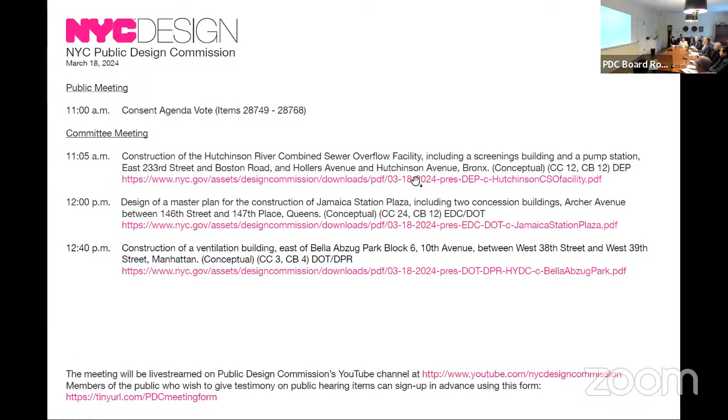And we'll now begin the committee meeting. We'll start with the conceptual review of the construction of the Hutchinson River Combined Sewer Overflow Facility at East 233rd Street and Boston Road and Hollers Avenue and Hutchinson Avenue in the Bronx. Again, we'll not hear public testimony or vote on this project today. Presenters, you can begin when ready.

Good morning, commissioners, it's nice to see you today. My name is Alicia West, and I'm from the Department of Environmental Protection. I'm the Director of Public Design Outreach. So we're really excited to be here today to present our designs for our Hutchinson River Combined Sewer Overflow Facility. I'm joined today by Austin Seid from HDR, who will be doing the rest of the presentation. Kevin Lloyd is also from our consulting firm, and my colleague from DEP, Wing Zito.

Okay, so our project is located in the northeastern section of the Bronx in Eastchester, on the western side of the Hutchinson River. The area is zoned manufacturing, and we're actually inside the industrial business zone, or IBZ, which was created to foster and grow industrial businesses in the area. We're going to be presenting today designs for two buildings, a screenings building and a drainage pumping station. Both will work together to reduce the effects of combined sewer overflow into the Hutchinson River.

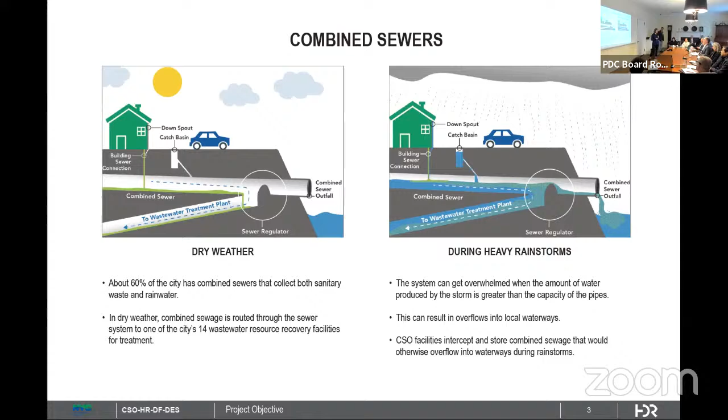And the reason it's like this is actually because it was designed to behave in this way—it was designed as a fail-safe. So rather than having combined sewage come up into people's homes or into the streets, it was designed to overflow into a local waterway, in this case, the Hutchinson River. And we've been working with our state and federal government partners to reduce the amount of combined sewer overflow citywide. Combined sewer overflow facilities are one such solution we've been working on, and the way these work is they basically intercept and store that combined sewage that would otherwise overflow into the waterway during a rainstorm.

And so what those are doing is they're pulling out any debris that's found its way into the sewer, whether that's litter from the street that swept down a catch basin or what have you.

Then the water is routed into this very large underground conduit or tunnel. This is a storage tunnel. It can hold 2.8 million gallons of combined sewage.

Should we ever have a storm that exceeds that volume, we do have the ability to outfall into the river. However, that sewage will have the benefit of already going through the screenings building, so it will be a

much cleaner overflow than it would if it was just a direct outfall. Okay, so our water is impounded in our storage conduit, and when the storm passes, we have our drainage pump station, which pumps the combined sewage out of the tunnel and back into the sewer system here on Pinckney Avenue. And then that is conveyed to our wastewater treatment plant in Hunts Point.

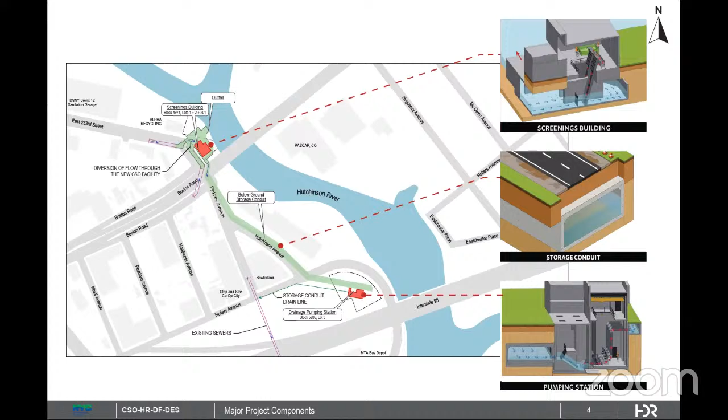Thank you, Alicia. Just make sure this is working. Hello? Is mic working? Yes, we hear you. Thank you. You can hear me okay? Oh, great. Thank you for having me.

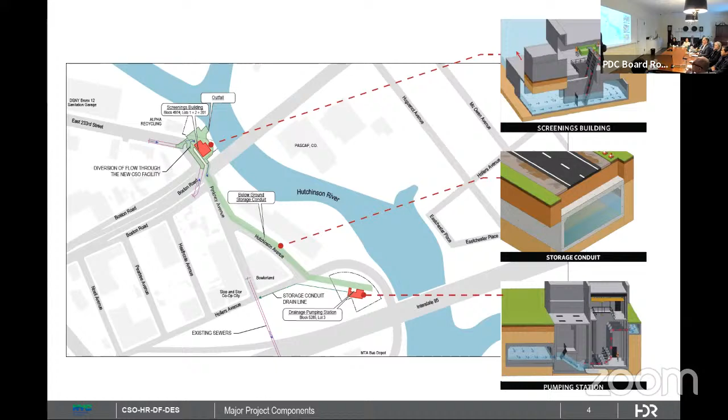So here's more of a contextual view. What do they glimpse at now? Right now, they're looking at recycling, industrial type facilities that move scrap material.

So as I move on, you'll see some of these other facilities. But again, you have industrial on this side and residential over here.

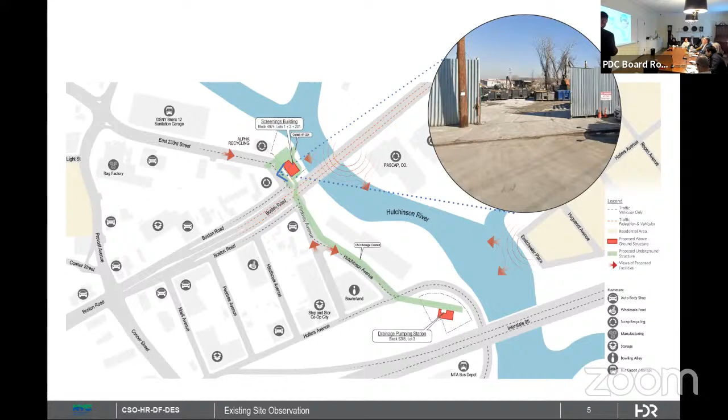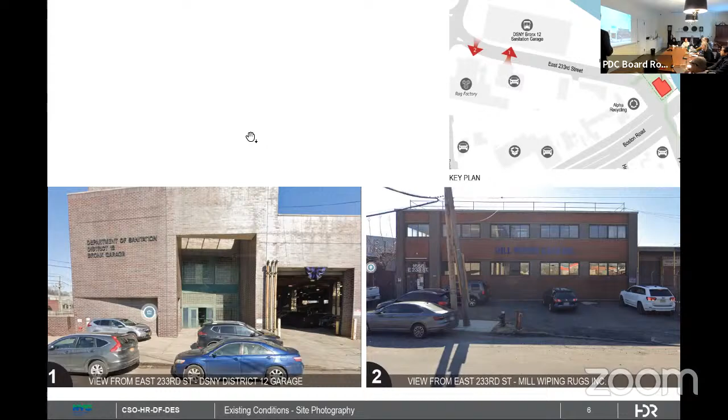And then here on the right, you have the Mill Wiping Rugs building, mostly masonry, has some ribbon windows. It lets in natural daylight. It's probably very interesting to work in that building.

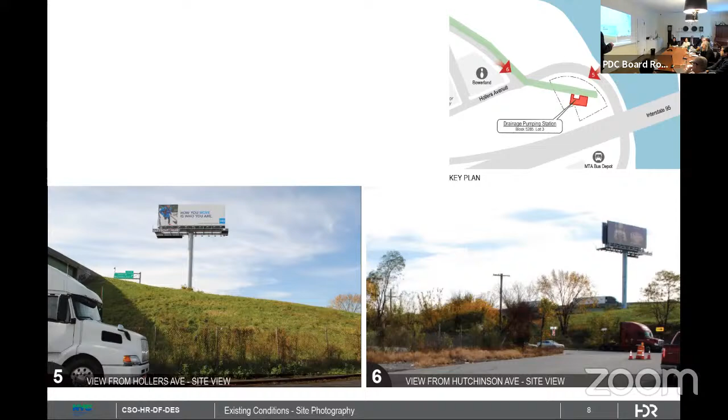And then, of course, we have our billboard, right? We have our beautiful billboard here. And then we have other types of businesses, scrap metal, junk, storage facilities, and they all have this industrial language of corrugated metal, exposed steel, access gates, signage just kind of popped on the face of the building.

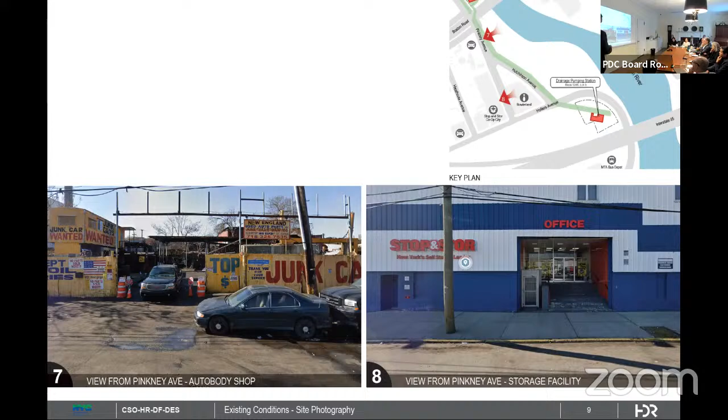So we have a kind of wide vocabulary of various industrial type buildings that we were looking at in the early stages of design. We thought, this is a project about moving water, we're on the water, can we extract some of the interesting qualities of water, the rippling texture, the specularity of the surface. We thought maybe we start with the vernacular industrial language that we're surrounded by, and then amplify that a bit.

So we started with the rippling of the water. Let's come up with a couple of module types that we could use to drive the envelope of the building. Now we know that this is an industrial type building.

It's for the Department of Environmental Protection. These buildings are very functional, driven by equipment and by the conduit that runs underneath the ground. So in terms of site orientation, it's really important that the buildings are configured and oriented with respect to the conduit - where's the water, and how do the buildings interface with what's going on below the ground.

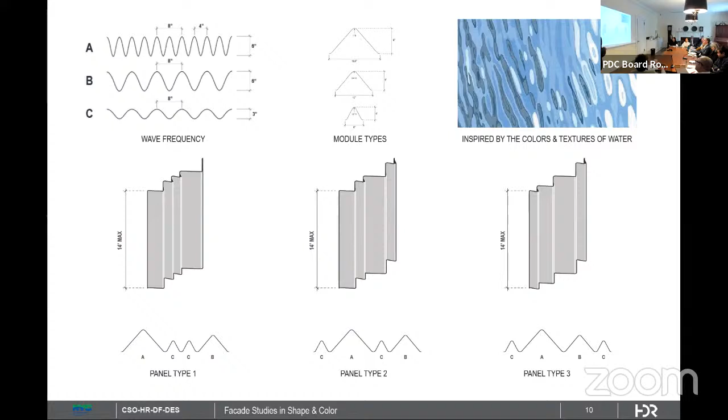With all of that said, we wanted to focus our effort on trying to develop an interesting looking building, because there's a lot of building underneath the ground that people are not going to see. So we're trying to accentuate what people do see. We developed this panel language of potentially different panel profiles.

And then we thought about color. Maybe we could look at parts of the facade that could have a gradient, with kind of the playfulness that the surface of the water has. And we thought it might be interesting to start with the colors of the DEP logo.

So people would experience the building and immediately understand - if they're familiar with the colors of the DEP, they would kind of get it, it would make sense. This is a DEP building.

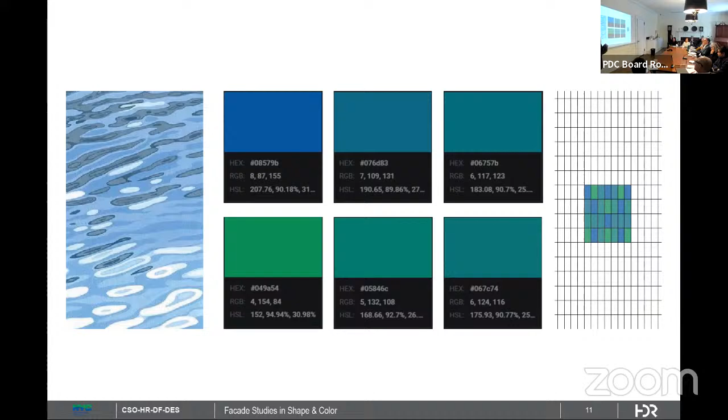And then we were thinking, okay, are there any other buildings that do this? So we did search around a bit, and we landed on a couple of buildings. One is this building by Damien Hirst Studio.

It has a beautiful brick facade, a glazed surface. It's very organic, it undulates. The bricks are custom, but it's gorgeous.

And then we have these other buildings here, Heytown Art Center, fantastic perforated metal facade, very durable brick base. It's almost like it's beautiful because it's so simple.

And then we have this building, the School of Film and Television at Loyola University by SOM, which has this interesting facade consisting of a perforated screen cladding. It has these undulations that really lend themselves to the kind of study we were working on at the time. So these were our precedents, and this is where we started.

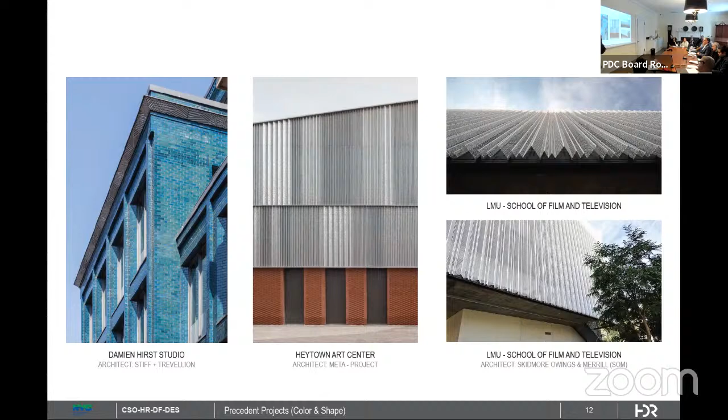And where we graduated to was, what if we have a building that has this really organic, undulating brick veneer? We know these buildings are very horizontal, so we want to also accentuate the verticality of the building. So we orient the brick in a stack bond vertically.

We create a transition strip out of a ribbon window, similar to some of the buildings we're seeing out on the strip there on East 233rd Street. It reflects the sky, it lets in daylight. This is not a normally occupied facility, but we still want to make sure we're providing daylight to the people that are going to actually be entering into the rooms.

And then we have this fantastic opportunity to create this rippling metal facade. So you have all of this precedent for corrugated metal, but we're drawing our cues from the water. So there's this fantastic opportunity to create an undulating, ever so changing facade as you move around the building.

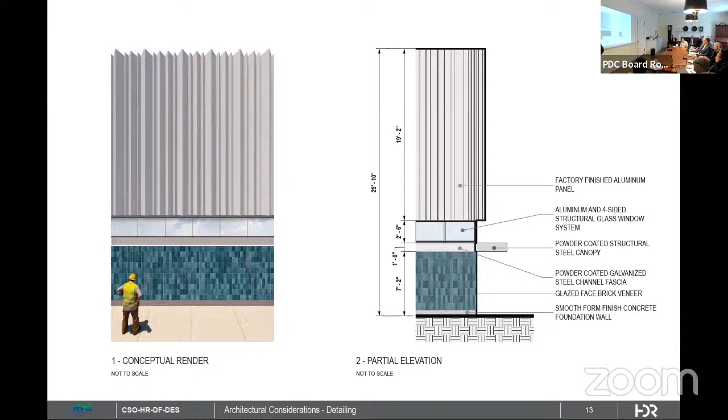So we tested it, and this is what we came up with in the initial phase without deploying it on either of the sites. To take it a step further, we thought about the cladding system - not only are we drawing our cues from the water, not only do we have water in the conduit, but let's create a rain screen system so that we're actually bringing water into the building. Let's let the water into the facade so it enters into the skin of the building, and then we release it out through the sill when it weeps.

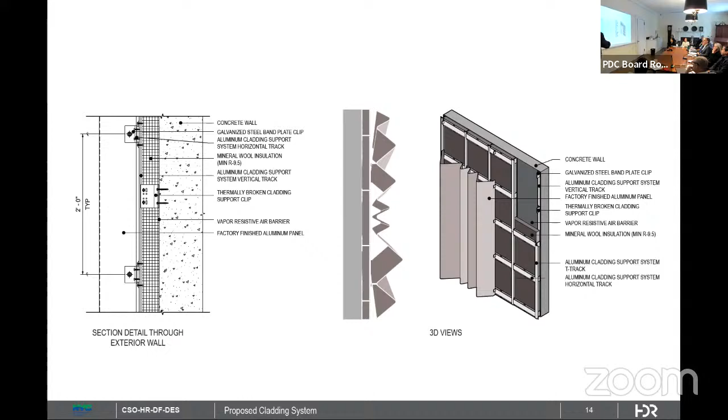So this is just an example of the rain screen cladding system. Insulated facade - you can see the mineral wool insulation back here, and an aluminum support system.

But the interesting thing about this site is that it's right on the Hutch. So once you get to the back of the site, there's a very sharp embankment that goes down into the river. So what we did was we thought, okay, we have to consider where's the conduit in relation to the site, and how does the building get organized on the site.

And then once the building was locked in place, we started to bring truck movements in and think about how we're going to bring debris, because as Alicia mentioned, the screenings building functions by taking floatable waste out of the water stream. And to do that, there's actually equipment in the building that rakes debris out of the water that's in the conduit below the building.

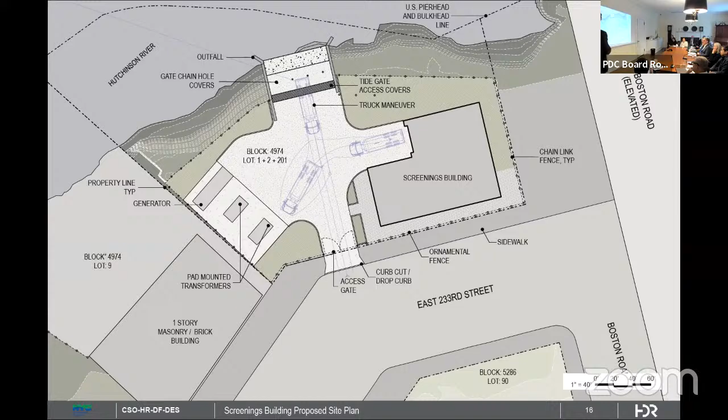So this is the building here. The first floor of the building, as I mentioned, has the conveying system and the bar racks. The building's about 55 feet wide by about 71 feet long. The two major spaces in the building are the electrical room, which is kind of the service side of the building. There's also a room here for the backflow prevention system and a toilet for the employees when they do show up on the site.

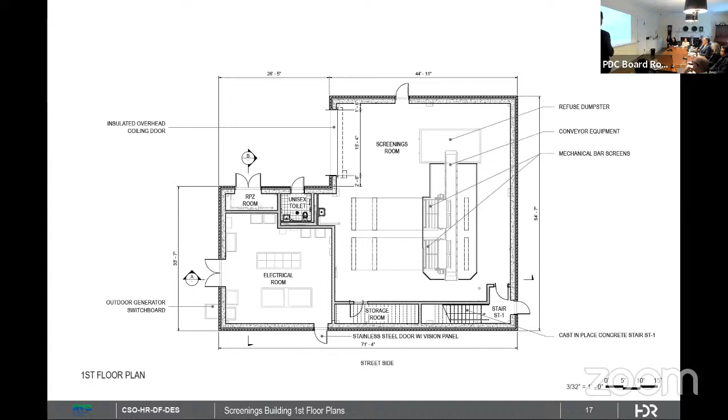Most of the rooms open outwards. They don't generally communicate with each other. That has to do with the classification of the spaces with respect to hazards. So everything really exits out. The only stair in this building is in this location here, and this goes up to the roof. This is the low roof, and this is the high roof.

And currently we are taking time to plan out where the heating and ventilation equipment goes, the various drainage systems for the roof. And in particular, on the high roof, we have this element here. This is a hatch, so that at some point in the future, if they ever have to take the equipment out of the building, they can take the hatch off the building and crane the equipment right out off the roof.

And if I'm not mistaken, there is an intention to put solar panels on the building to generate electricity, and that's currently being worked out as well. But before we put the cart before the horse, we have to work out the systems design first, and then we see what's left and available for solar panels, and then we'll start studying that a bit.

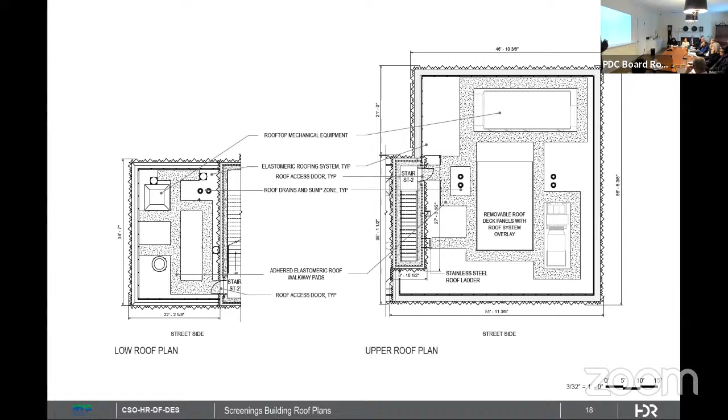The bulkhead stair is the highest element in the building. Overall, the screening building is about 40 foot 6 inches. But that's for the bulkhead stair, about 30.5 for the high roof, and about 20 feet for the low roof. So at its highest point, it's about 40'6".

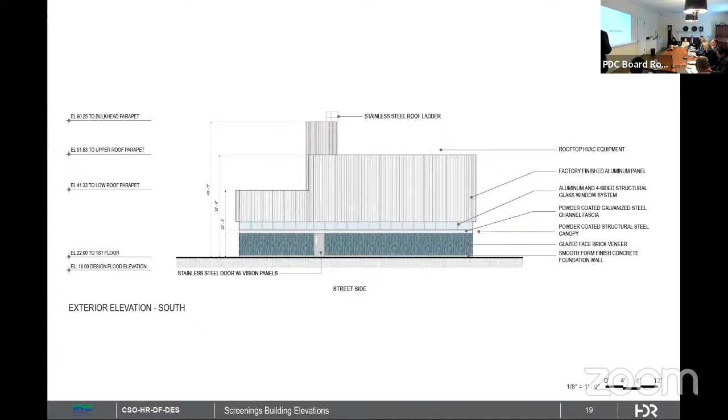On this side, you're seeing the overhead coiling door. Again, this is tucked behind the building, so it's really not expressed towards the street. The business end of the building is tucked away. While people are pulling trucks in and out, it's really not happening out front. Even though it's an industrial character neighborhood, it's kind of tucked behind, which I think should be more peaceful.

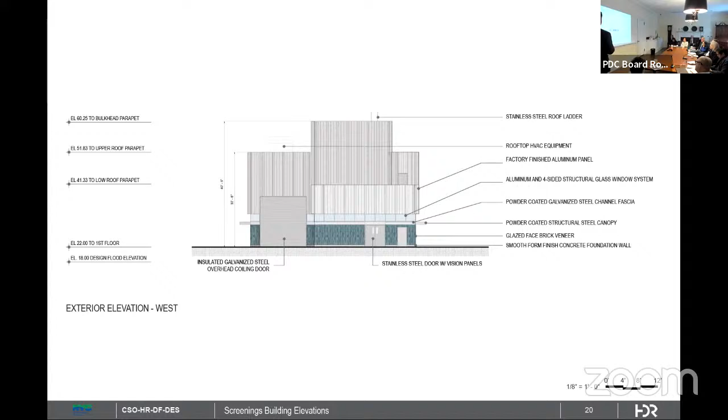Another side of the building, very similar. All four sides have a very similar aesthetic.

Right here, you have these rakes that go down into the conduit and pull material out. It actually dumps it onto a conveyor and then dumps it into a container here, and that's what the trucks are accessing. They're coming through the overhead door, grabbing the container, and pulling it out. So the building is very much driven functionally in terms of the equipment.

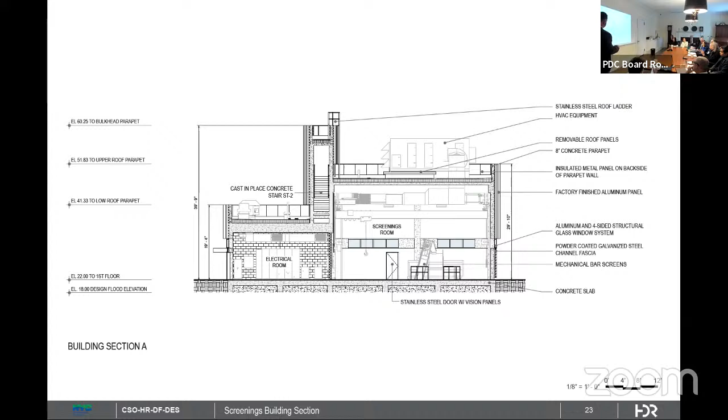You have a bridge crane in here that moves back and forth to grab different pieces of equipment. Then you have another layer for HVAC equipment, and then the roof. And then you have the hatch and the HVAC equipment on the roof. Another section through the service space showing the overhead door.

I'll move on to the next slide. Any questions about the screenings building?

This will only be occupied for security and maintenance, at certain times when there's like a huge storm, basically. We send crews out. It is an unmanned facility, so it operates remote. If it's necessary, it turns on. We have operators who visit it to make sure it's in good shape. They come by usually once a week or daily, or just depending on what's needed, but there's not anyone working in here.

On the design, I was just looking at the section because you're near the river, and I was thinking of your electrical equipment on the first floor and all that. Both of the buildings are designed above the base flood elevation, plus freeboard, plus all of that. Everything is protected.

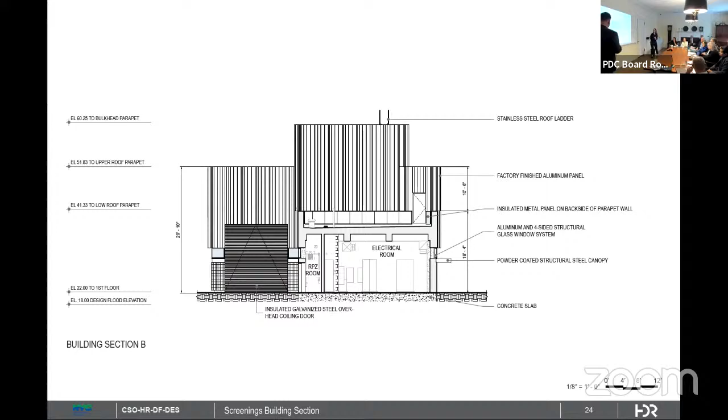So let's talk about the drainage pumping station a bit. As I showed you before, this is a pretty severe embankment next to the New England Thruway. There is a truck repair facility on the north side of Hollers. Hutchinson transitions into Hollers. Hollers goes underneath the Thruway and comes out on the other side. If you know anything about this area, you might know that on this side of the highway is the MTA bus depot.

So this is the street I was telling you about, that's mostly trucks and trailers and folks just kind of camping out. There is no sidewalk on this side of the street, and there is this large embankment, and we have this billboard structure here that I was showing you in the photos. We are on lot 3.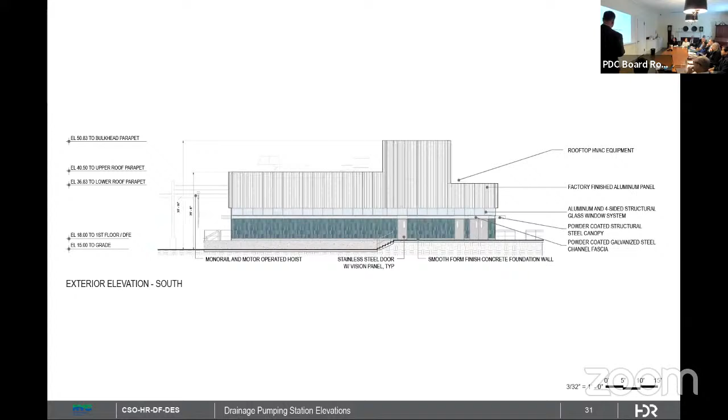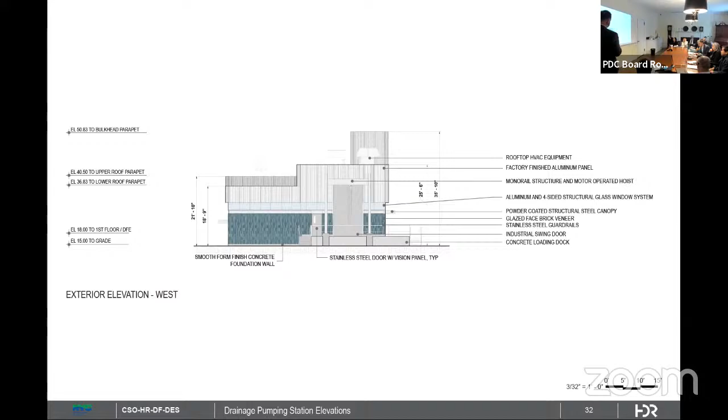We have a large industrial swing door that's used to bring the equipment in and out, and this is the structure here that will support the monorail for bringing pumps in and out of the building through the industrial door. Here's a section through the building showing the service.

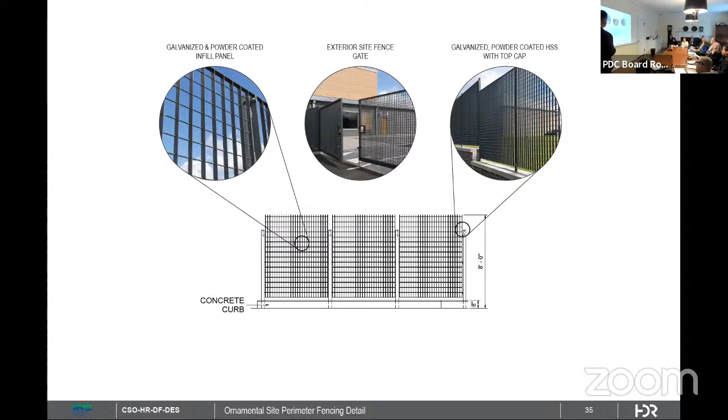As I mentioned before, both sites are going to require secure environments. We're planning for a perimeter fence consisting of a short 8-inch concrete curb, a durable base with an anti-climb type fence with very narrow gaps so you cannot get a foothold on the fence. The tips of the fence would also have pointed edges to prevent people from scaling it. All galvanized steel and powder coated.

We're currently planning for premises identification totems on both sites. We're experimenting with whether they're located in the perimeter fence or set back. The important thing is that the fence is porous enough to be able to see the building, so we're not basically blockading these fantastic looking buildings that we're designing. You want to be able to see them, experience them, and enjoy them.

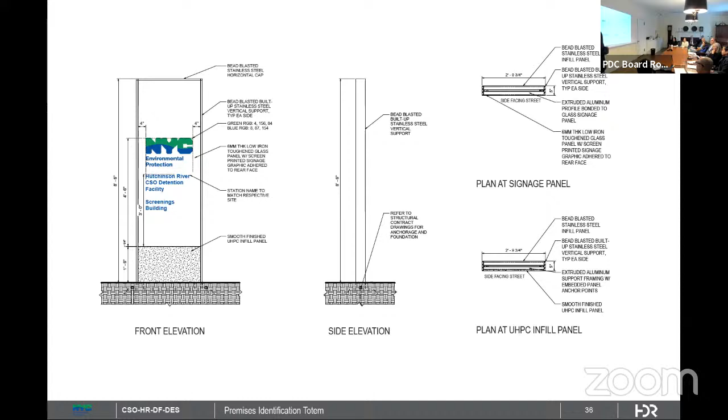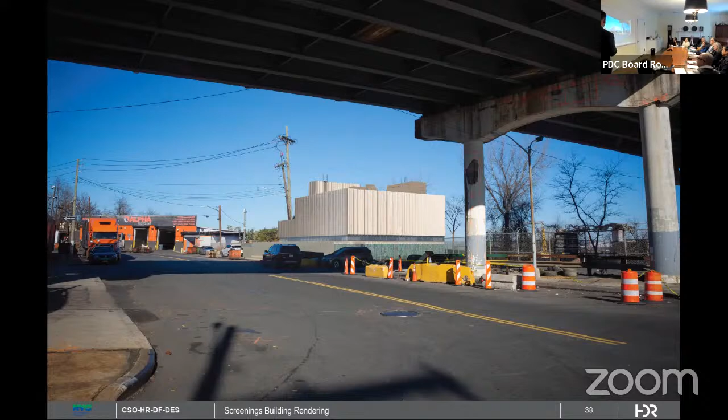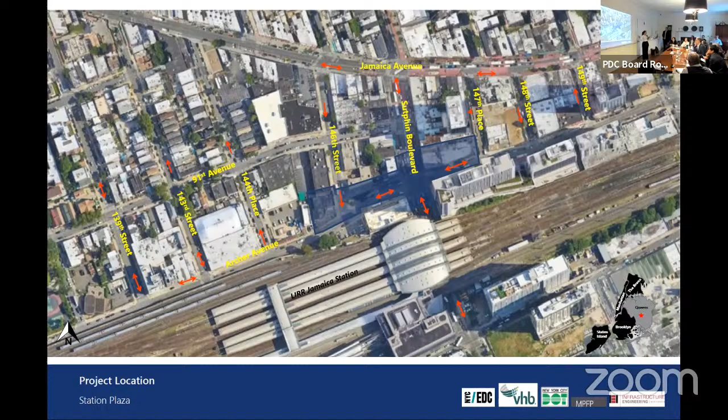Okay, so I'll just talk at a high level through some of the existing conditions and neighborhood context. We are in downtown Jamaica. In blue here we have the approximate project outline. In addition to the public space, we are also modifying a portion of Archer Avenue — so it's public plazas in conjunction with the streetscape.

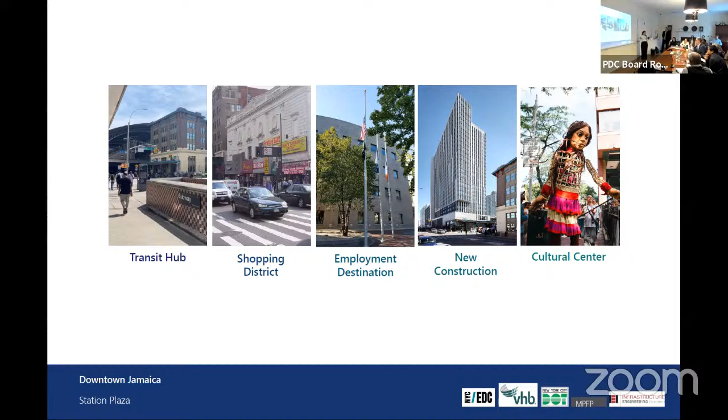Most people are pretty familiar with downtown Jamaica. It's a major transit hub, shopping district, employment destination, with a lot of new construction and new high rises going up, but also a major cultural center. So this project, we're aiming really to provide additional value within the context of the neighborhood.

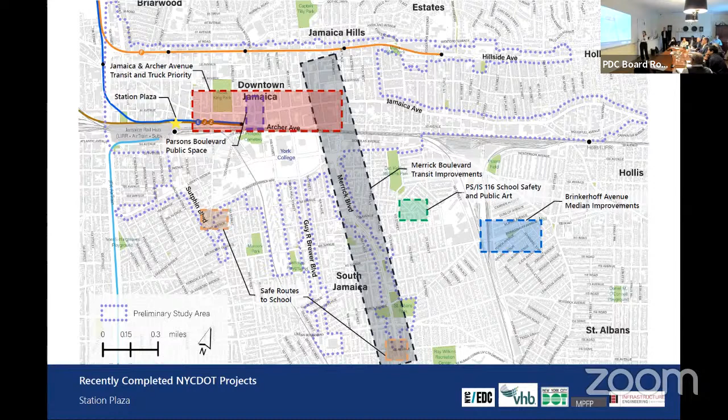Here, there are a handful of DOT projects that have been recently completed in the area. You see Station Plaza, just for context, marked with the star, but there's also the Jamaica and Archer Avenue transit and truck priority project, some school safety projects, median improvements, Merrick Boulevard transit improvements, and some safe routes to schools projects. These are projects that have been completed.

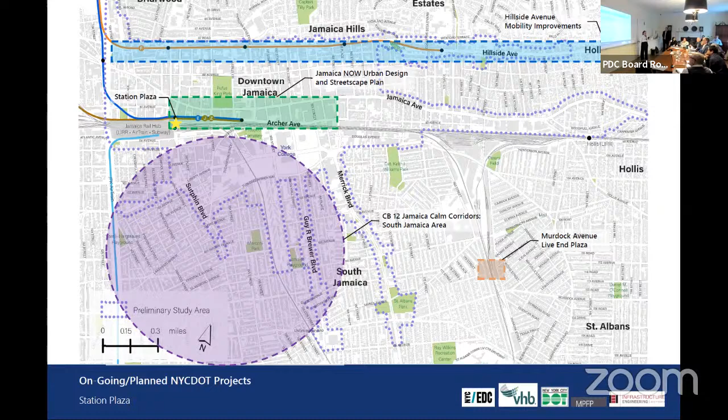And then ongoing and planned DOT projects — a lot going on in this area. I won't get too into them, but we do have DOT here if questions arise in context to Station Plaza. And I'm going to hand it off to Mike. Terrific. Thank you, everyone, for having us here today.

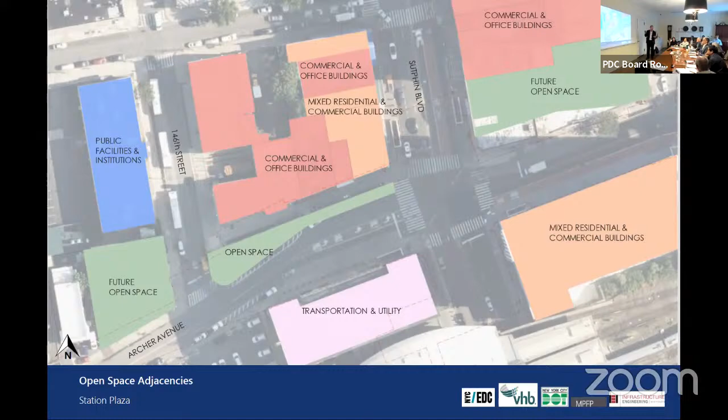So these are the three spaces that we're now changing over to public space. We're trying to keep some uniformity between those spaces, using similar materials, paving, planting, things like that. I think it's important. There are existing trees in the middle plaza that we're trying to connect to.

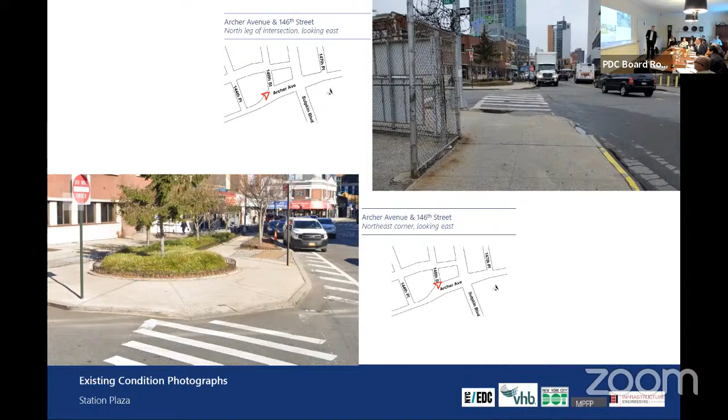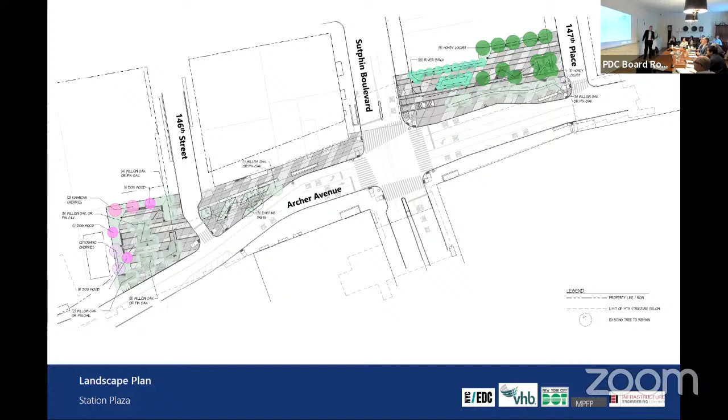These are just preliminary planting plans, some trees we talked about with the group, as well as additional lighting, both armatures for pedestrian lighting and new street lighting.

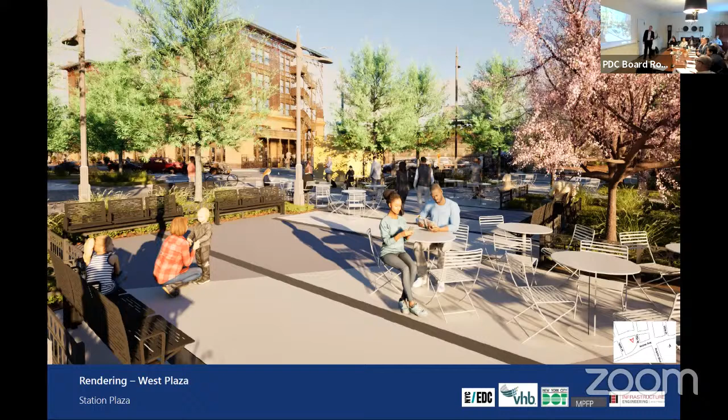These are some preliminary renderings that we put together. Again, flexible seating in the space, and on the perimeter we can have fixed seating that works with DOT. Again, keeping the plant material high up and low so visibility throughout the space stays clean.

You see the new transit entrance. Currently it's sitting over here, and if you look back, the sidewalk there is relatively narrow. There's quite a bit of movement out of that station, so by locating it here, we limited the plant material around it so pedestrians could get in and out quicker. The building on the upper left is the ticket building, which is existing, at the Jamaica station.

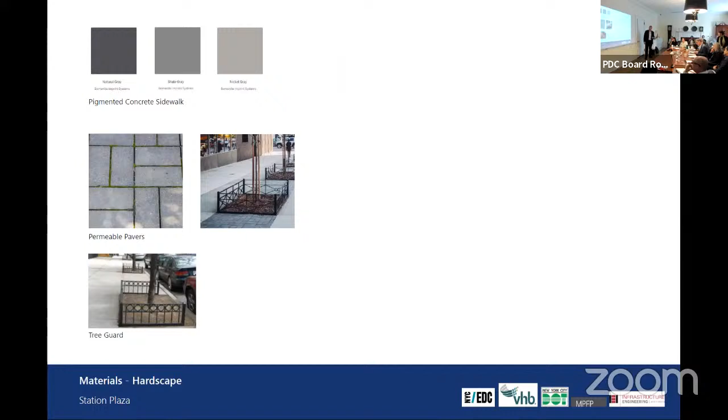Again, we went through planting palettes with both DOT and the community, things they felt they could maintain - concrete as well as permeable pavers, so that we can retain water on site as much as possible and have good stormwater management practices. Again, working with DOT's materials. I think that's it.

Okay, go back to the plan. Sure. Yes.

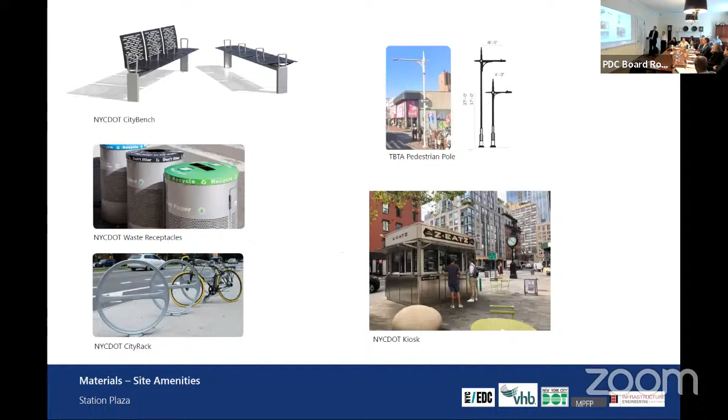Commissioners, questions or comments? I have a couple. My main question, which was circulated to you, is to understand a little bit more what the community desired out of this space, and what was the relationship between DOT and the BID in terms of both maintaining it and programming it.

You mentioned in your responses the idea of potentially using this for markets or other types of events. Can you walk us through how you would see those markets being set up, in terms of the relationship of the trees, the tree beds, the fixed furniture - where does that go versus what areas do you envision being more permanent as they are?

Our first design had much deeper planting beds along the perimeter as well as internally, but through the community process we discovered they would rather have tents and the ability to set up things within that space. So those beds became much smaller so we could set 10 by 10s in essentially rows, and we set circulation patterns so people could move through. That was something everybody agreed they really would like to see. So you laid that out on that side - we did.

10 by 10s fit. And what about the other sides? They seem a little bit narrower. This is now permeable pavers here, which allows the flexibility for them to set up tents under the trees. But also this perimeter was a little bit deeper, and then we essentially pulled that back so we can lay those tents out.

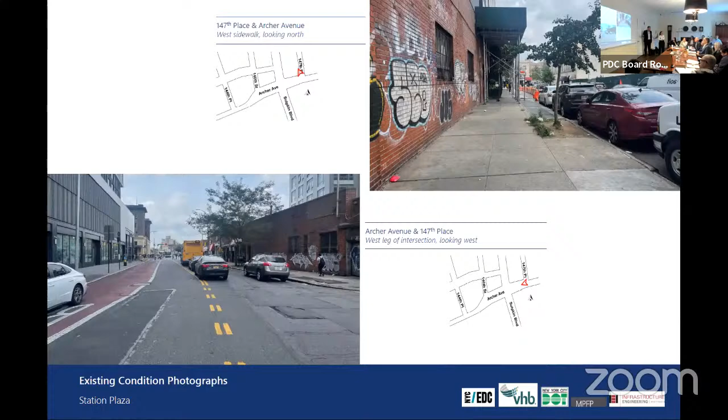Yeah, those are buildings, right? It's the old post office. So there's an old post office there, which is currently vacant. These buildings were taken through eminent domain basically in the early 2000s, I would say. So some are vacant, some have tenants that we're working to relocate actively.

Got it, so the building will be razed and the park will get built. Yeah, so those buildings will be demolished. We're working through asbestos and site remediation type work right now to really see what we're up against for that demo, but we will be replacing those buildings with plaza, and some of them have basements, which—I'm an engineer—present an opportunity for stormwater management that I'm pretty excited about. That's exciting.

Any other questions, comments? Okay, well—sorry, I had a quick question. I was wondering if you know what the program of the surrounding sites will be and how that might impact the plaza and the interaction between the people using the building.

So we're joined by Neil from DOT, who's working on Jamaica Now. If you want to take that question in context for Jamaica Now, I think that's kind of key. So we've been looking at, there's actually rezoning afoot, and we've been looking at some projected development sites around that really proffer some possibilities, especially on the West Plaza, because those are projected sites around it. So we're all looking at the possibility that maybe the new buildings could face the plaza and activate them. We're really looking through that prism of those spaces. On the East Plaza, there's a hotel and development in the mid-block, which is really exciting.

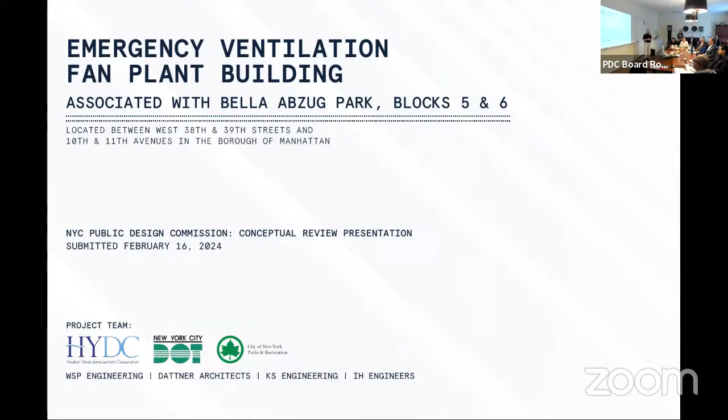And now we're bringing you the emergency ventilation fan plant building. They asked me to let you know why it's needed.

We knew there would be some type of ventilation required because we are decking over the Amtrak line, which runs underneath here and comes up right in the middle of our sites at blocks 5 and 6. So from that, we did think we would need some ventilation.

We didn't realize how robust or stringent it would be, but there are a lot of new requirements because of health and environmental issues and workers below the deck, as well as the fire and life safety issues if there's a train fire. So Amtrak has many more stringent requirements.

This is also the place where the system goes from electrical to diesel, at block 6. So from that, this is where we got the ventilation building that you are looking at.

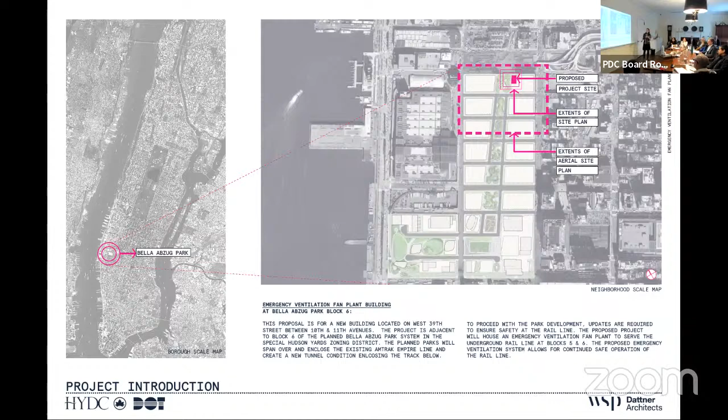I will now turn it over to Beth, who will present the project. Thank you, Angela, good to be here. I'm Beth Greenberg, one of the principals at Dattner Architects. Dan is the designer of the project. We will give you a brief introduction of some of our thoughts.

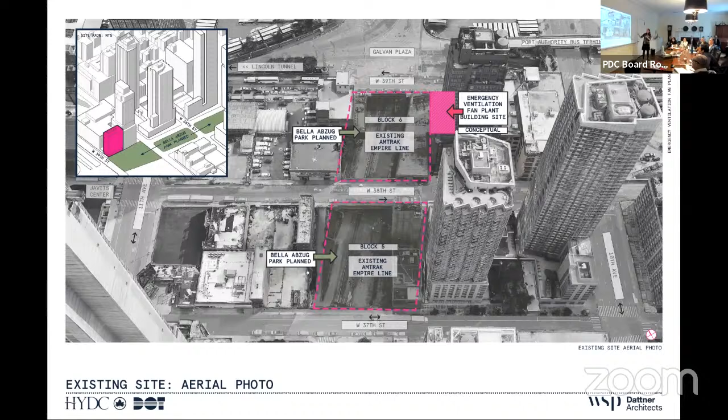Here you can see the actual Amtrak cut, and our building is just going to be just to the east of the park. I'm going to go through this site context pretty quickly, but I do want to call a couple of points to your attention. One is you can see the Lincoln Tunnel vent building right down the road from us. This is 39th Street, which will be the main entrance to the park and the main entrance to the fan plant.

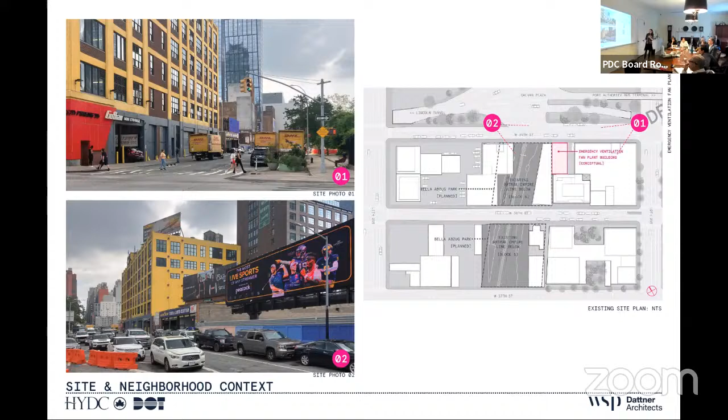And just from the opposite direction - what you'll see here is, again, a closer view on 39th Street, and our building will take roughly the first 2 bays of the Goodyear building. The rest of the frontage will all be park.

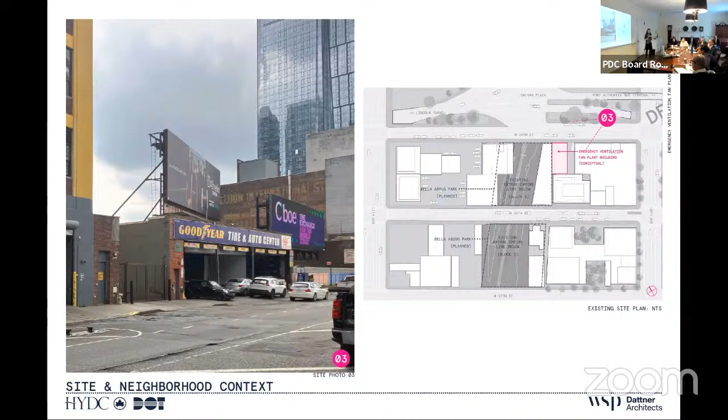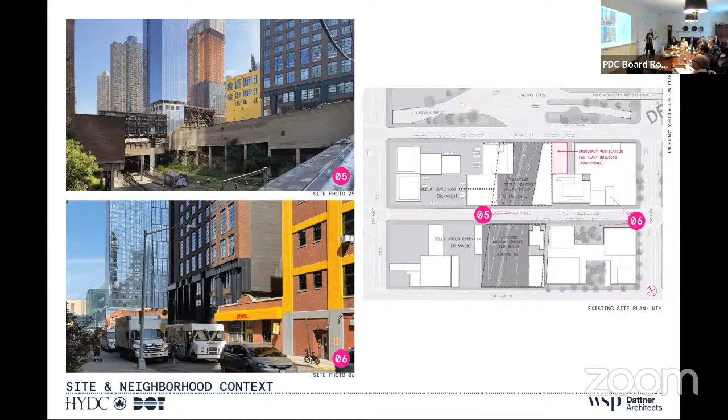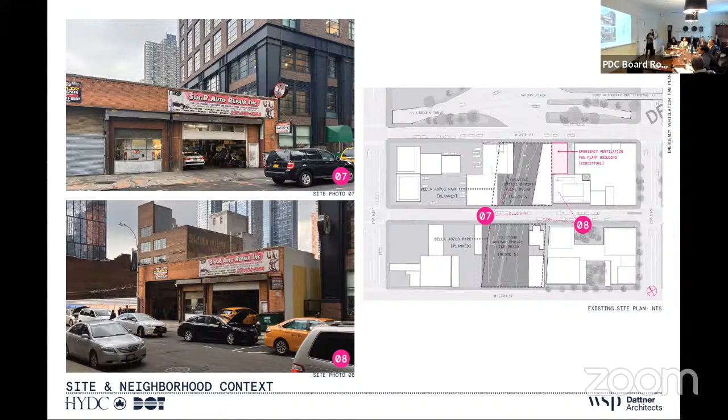And here is the view from the west, looking towards the DHL building. It's really a neighborhood in transition, being at the upper end of the Hudson Yards redevelopment. And here, looking southward.

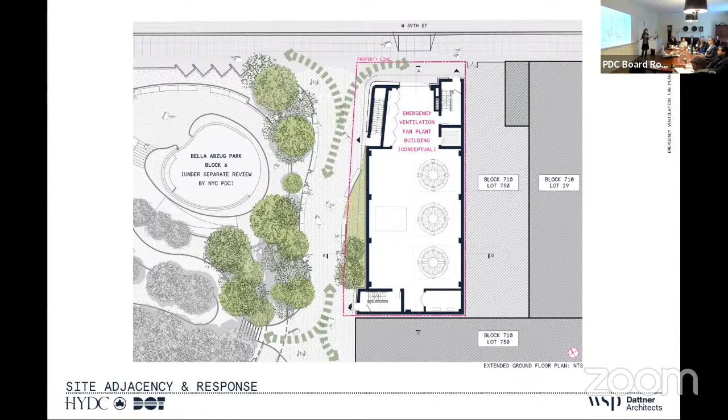And we worked with Hudson Yards and with MVVA to make sure that we could provide landscaping against the building, so it really becomes a backdrop to the park and not something completely separate. What you see also, the big circles are essentially the diameter of the fans that will be serving this emergency ventilation purpose.

From the design point of view, the street level is really the critical space that we make continuity with the park, with the urban environment. That essentially becomes the base of the building.

The body of the building has really two layers of relationship to the surrounding. One is the park level, where we're basically aligning our building with the top of the tree canopy of the park, and that's the point where the ventilation starts to occur. Then the building is more or less a filigree as it goes up and extends into a parapet.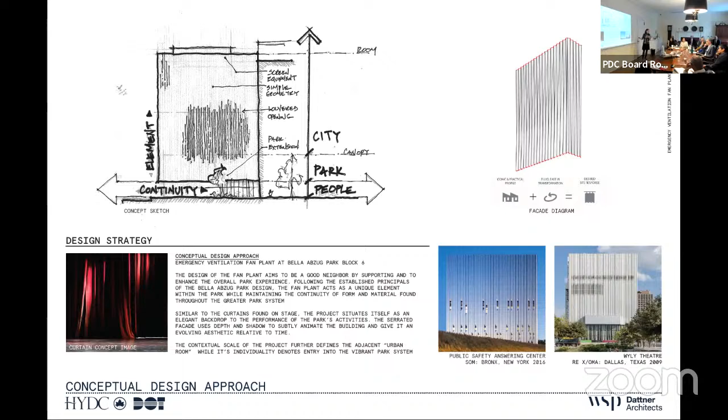So just quickly, adjacent is a tall brownish reddish masonry residential building. Yes, this is the residential building, and the structure where the ventilation unit is, is this.

I'm curious, the vista from the residential building, what is that, southeast? South, yeah, right? This is 39th Street, 38th Street. So this is the west face, I mean, the eastern face of the park, looking west.

Now just tell me, the abutment of the ventilation unit to that building is up to what floor? I don't know exactly what floor that is, but we're roughly the same height as the podium. Right, so maybe 10 or 11 stories. What's in those bottom 10 stories of the residential building?

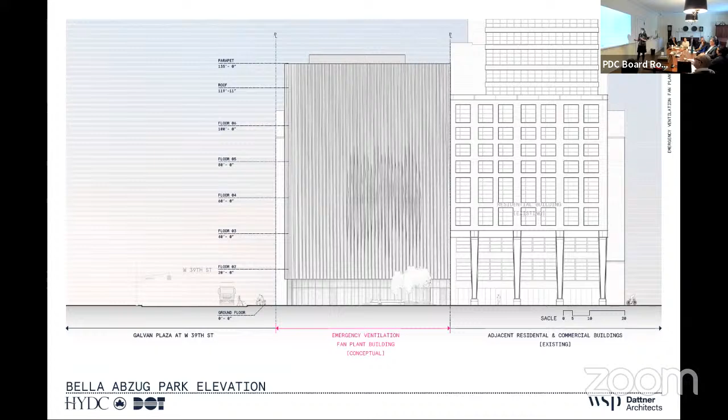Part of our idea is that it is a backdrop. It doesn't scream out 'I'm a fan plant,' but rather 'I'm a fabric on a sculptural object,' which doesn't have any windows, so it's rather scale-less in a sense.

This shows you the section through 39th Street. The way it works, and you'll see in a section in a bit, the cellar level really pulls the air in. There are attenuators that are sound attenuators as the emergency ventilation comes in. These are the fans. There is another set of attenuators above the fans.

These are 20-foot stories to give you an idea of the scale. And then we have this plenum space, which is 40 feet high, roughly a cube, through which the ventilation pushes out any emergency conditions.

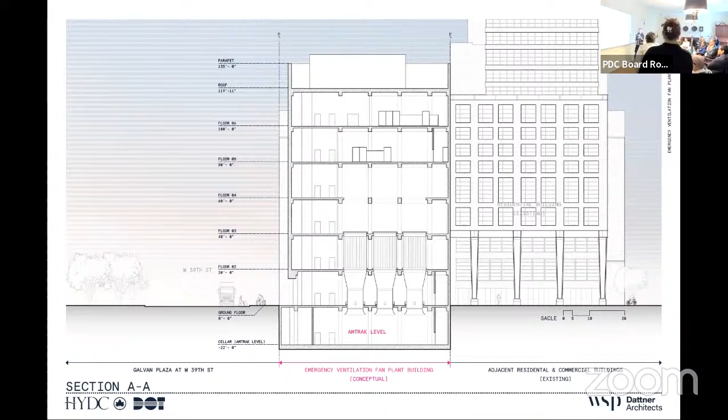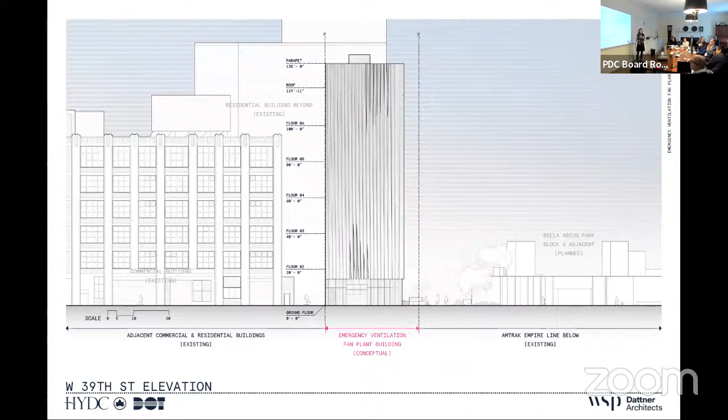There are no windows, no windows. There's also incidental ventilation on 39th Street. Again, the idea of our facade is that it is a transparent, breathing kind of facade. This is perhaps an exaggeration of the fingers, but it indicates where the building itself has ventilation.

And here you see from the train tracks pulling the smoke in, up through and out. And on the upper floors are the mechanical and electrical systems that run the building.

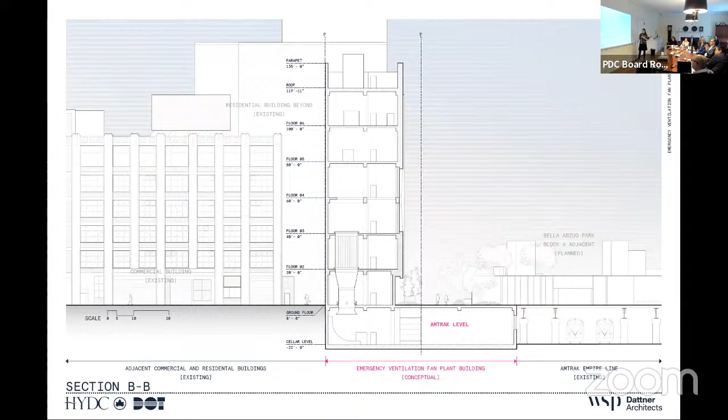The facade, as I said, would be a rain screen, but we're looking at several options. Probably our main option is a folded metal screen that actually rotates slightly as it comes up the building. It can be perforated, and therefore the difference between the actual 40-foot by 40-foot opening and the rest of the facade is de-emphasized.

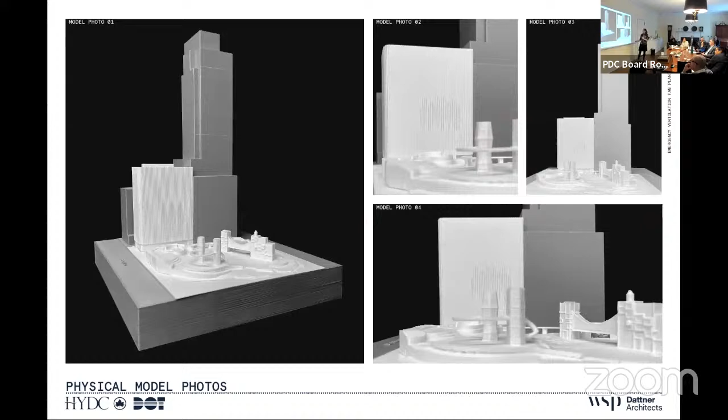And I can go through the plans. Okay. These are the model, you see it here, so I'm going to skip through it.

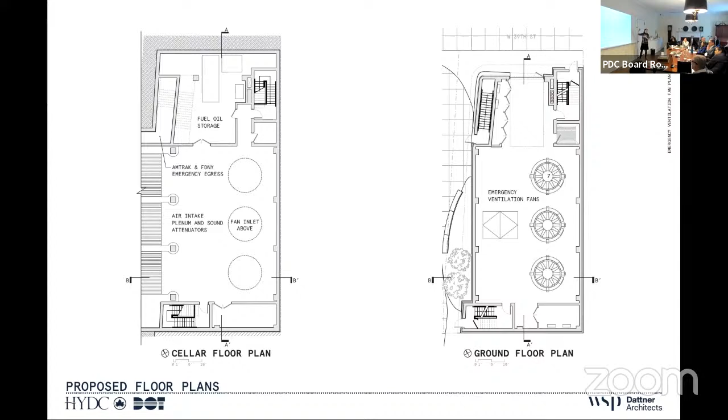This is the cellar floor, the attenuators into the plenum. The ground floor has a loading dock, the emergency egress, and then circulation throughout the building. It's basically at maximum 45 feet by 90 feet.

So very tight. The second floor and third floor—this is the upper attenuators, and these are the louvers that allow the fan to push the air through.

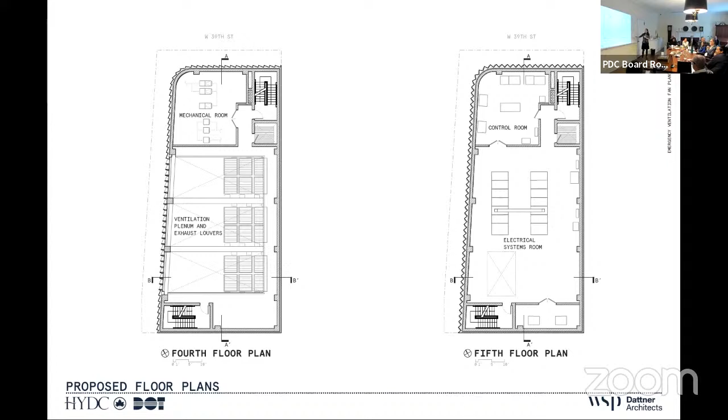The fourth and fifth floors, the fourth floor being the upper level of the plenum mechanical room, and then the fifth and sixth floors being the electrical systems with an emergency backup generator on the roof.

No, this building is totally unoccupied, except I was wondering, is that meant for non-municipal emergency? That's exactly right, and for testing. And also it's coordinating with, there are also fans feeding in from the south end of the park as well, underground fans.

We weren't able to do the underground fans here, given that we have a park. Can you explain that? You weren't able to do the underground because? Because first, we would need something that could expel the air. There's jet fans down below.

Keith, do you want to? Yeah, if I could, from the engineering front, so the way the ventilation for the whole park works is there's some overhead fans underneath the deck structure on block 5. They get their power and control from the building as well. And then the fans you saw on the first floor here, the 3 large fans, those are venting block 6 of the park. So it's 2 separate systems, one for each block, but all the power and control is in this building.

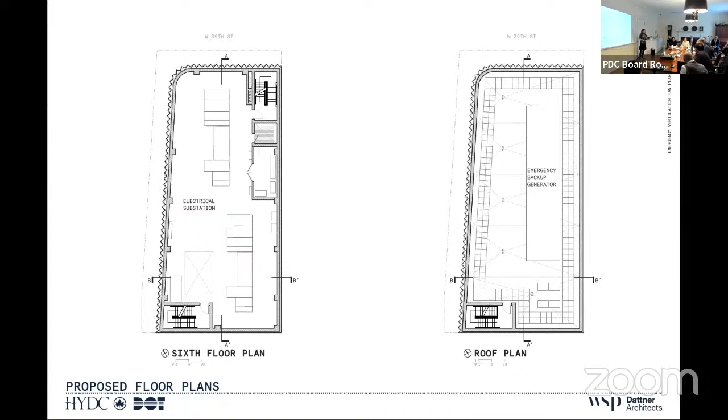Isabel? I would like to talk a little bit more about the facade, if we can go back to the facade rendering. Several questions. I mean, you mentioned that materially, I assume you haven't yet defined what the materials are since you're still in concept.

Yes, we are working with DOT and Parks Department on the materials. And so we wanted to work with them more about what they're thinking about in terms of maintenance. Obviously, we're looking at materials, and the thoughts we have are ones that are low maintenance because we knew that would be an issue. And so, but that's something that at the conceptual level, we're not really ready to put forward because we do want to study it a little more, but the goal is obviously something that's refined, but at the same time, low maintenance. I mean, I would say my first impression, you mentioned using kind of a warmer color palette

because it relates to the building next door. But the truth of the matter is that this neighborhood has a lot of new buildings going up, and they're all very, very different materially. There's some that are a lot of glass in lighter metals. You have Hudson Yards that also has a great combination of materials. There's the one next door, and there's kind of the industrial context of these lower brick buildings. To me, because the neighborhood is changing so much, I would err less on the side of perhaps speaking directly

to the building next to this building and perhaps a little bit more to the park, which is, you described this building as being kind of the northern anchor of the park, which I thought was a really interesting way to think about it. But this doesn't quite relate to me materially to the park. And I'm just wondering if that's a different way to start thinking about your materiality. This lower brick building is also going to be demolished in the future and become something else. And to what extent should this building be more that threshold, that northern threshold to the park, which I think it's really interesting because this park is tucked away from the north. Unless you know it, you don't quite find it. And having this building as being kind of that marker, I think it's a really interesting concept. At the moment, it feels like something else, not quite related to the park.